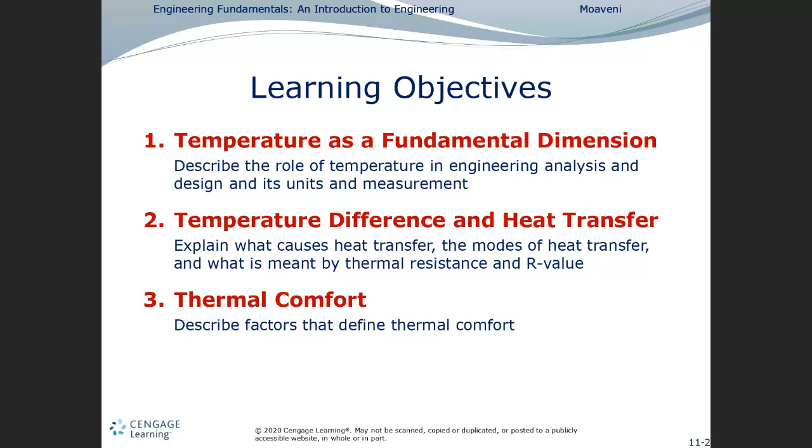Okay, yeah. All right, now you're getting into more how many molecules are vibrating, right? So that's going to basically determine how hot or cold it is. The faster they are, the hotter something is; the slower they are, the more at rest your molecules are, the colder it is. All right, that's good. So let's talk about temperature. If I can find it, what did I do with it? I think it disappeared. Oh well.

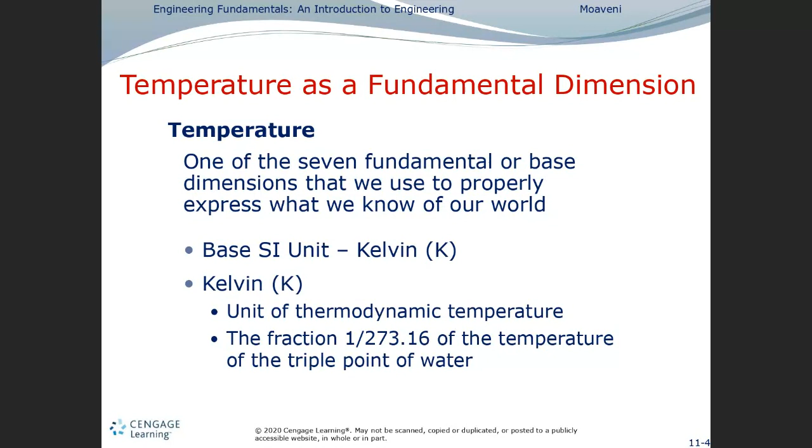So again, let's talk about temperature. Temperature is one of the seven fundamental or base dimensions that we use to properly express what we know of our world. Base SI unit: Kelvin, obviously, we've talked about this before. Celsius, right? And then imperial Fahrenheit, of course. But understanding what temperature means and what its magnitude or value represents is very important in understanding our surroundings, right?

The final project is a group thing too? Yes, right. The final project is a group thing.

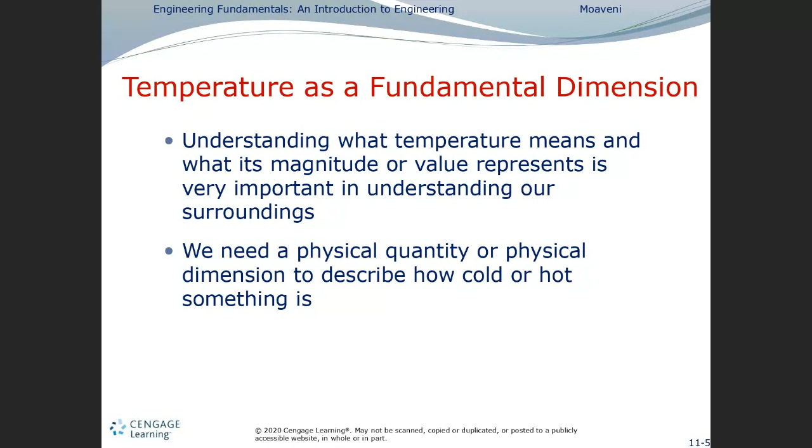We need a physical quantity or physical dimension to describe how hot or cold something is. So when you look at the role of temperature in engineering design, developing a good understanding of what is meant by temperature and how it is quantified is necessary in all engineering disciplines. So let's talk about temperature. I can't see my slides anymore. Oh, there it is. Here we go.

So temperature is a measurement, right? Temperature is the measurement of the object, more or less. And so it represents the level of molecular activity, as Hunter pointed out, provides a measure of molecular activity, as Cassandra pointed out. The molecules of a substance at a high temperature are more active than at lower, right? So what's the difference between temperature and heat transfer?

Nobody knows? Is temperature like the temperature of an object, and heat transfer is how much it's radiating off or onto something? Yeah, that's close, pretty close. Yeah, I like that.

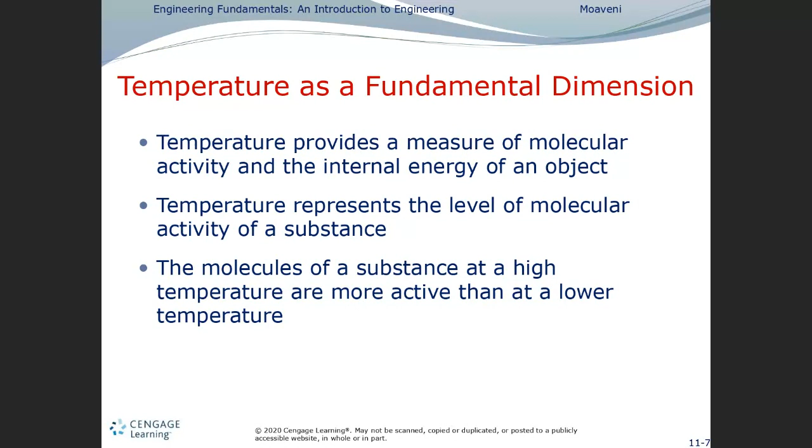So ways to measure temperature. What are some things you would use to measure temperature? Thermometer. What's another one? The laser thing. Right, like a laser, absolutely. And then there's the thermal camera. So the laser would be something similar to that. Another one would be a thermocouple. And then you have a thermistor. Then you have different types of thermocouples.

I'm jumping ahead in my slides. Let's see. Where we at?

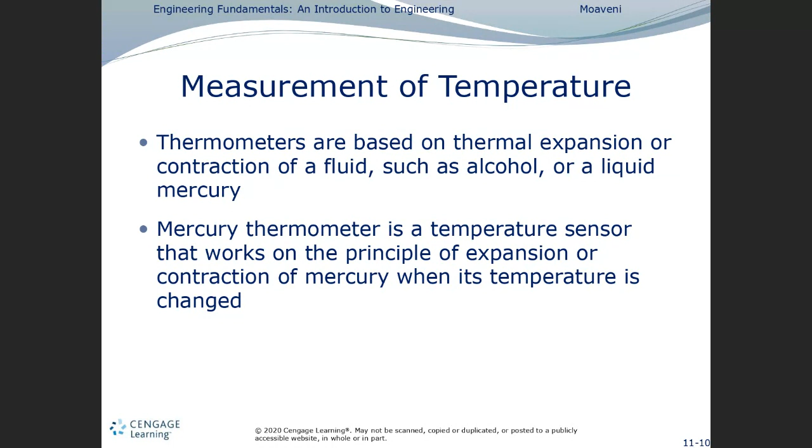Do you all have any dealings with thermocouples? No. Okay. So you use thermocouples, and you have different thermocouples for different ranges of temperatures. And obviously you all know about thermometers. Back in the day, you used to use mercury thermometers. You don't use those anymore because mercury is poisonous.

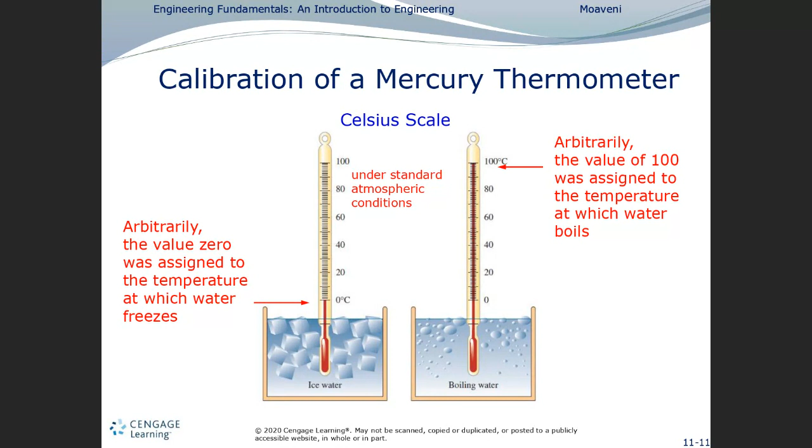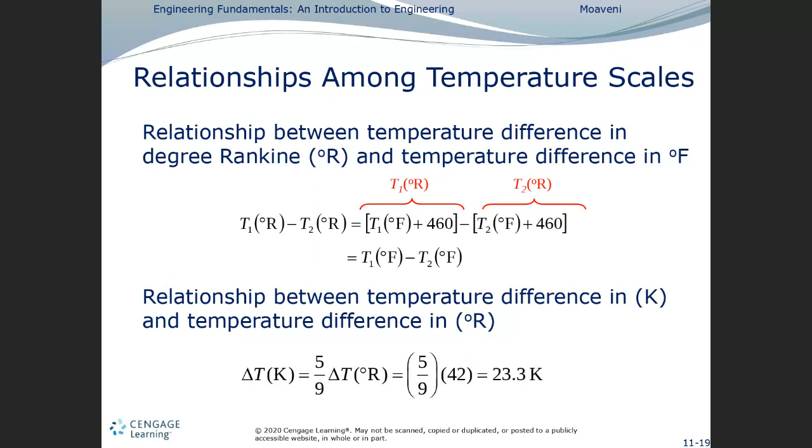This is all stuff that we've already discussed, like relationships among temperature scales, so I won't go into that. But let's jump into heat transfer. Temperature difference and heat transfer. Heat transfer is a form of energy transfer that occurs between bodies of different temperatures.

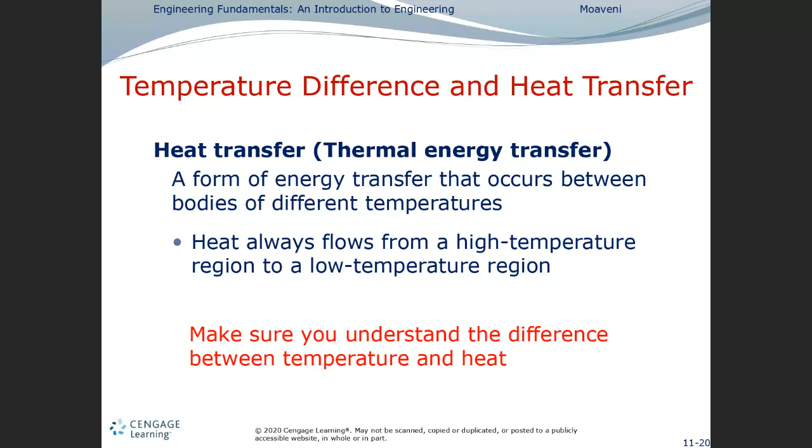Keep this in mind: heat always flows from a high temperature region to a low temperature region. Keep that in mind. And because it's energy, you have your units for energy, which is BTU, and calorie with a lowercase c.

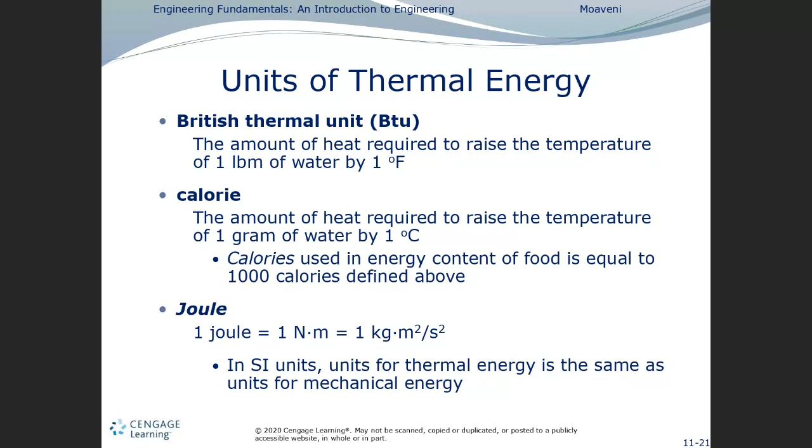Notice there's also uppercase C Calorie, which is also for energy, but it's usually used for food, so you'll see an uppercase C on food labels. The lowercase c calorie is energy that's used for heat transfer. And notice one uppercase C Calorie is equal to 1,000 lowercase c calories. So keep that in mind as well. These are just the conversions.

All right, so let's get down to the nitty gritty. Conduction, convection, and radiation. These are the three types of heat transfer. What is heat conduction? Anybody know?

What is heat transfer? Not heat transfer, I'm sorry. What is heat conduction? Yes, it's a way heat is transferred, but what is that particular way when you're looking at conduction? Two solids touching, absolutely. So somebody's been reading.

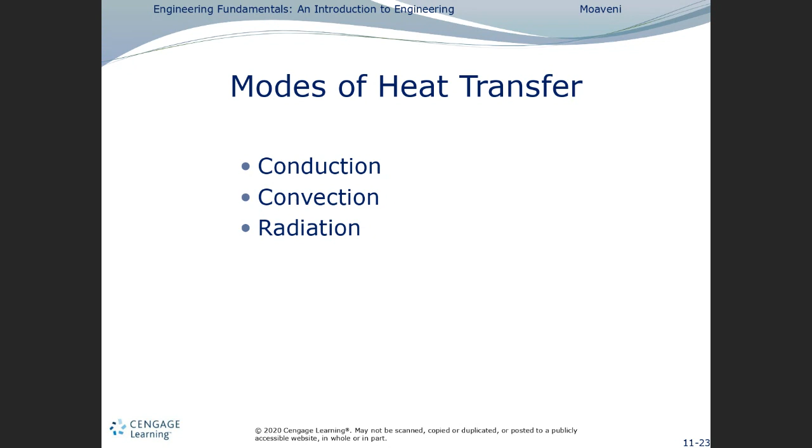Somebody has been reading. So conduction is a mode of heat transfer that occurs when a temperature difference or gradient exists in the medium. I know that all just sounds funny. A medium is an object. It could be an object, it could be a fluid as well, right? That's why they say medium. The energy is transported within the medium from the region with more energetic molecules.

So that just says the energy is transferred from the object that is hotter to the object that is colder. It always flows from high to low. So if you put two objects together and one is hotter and one is colder, the energy is going to transfer from the hotter object to the colder object. The energy is transferred from a high temperature region to a low temperature region.

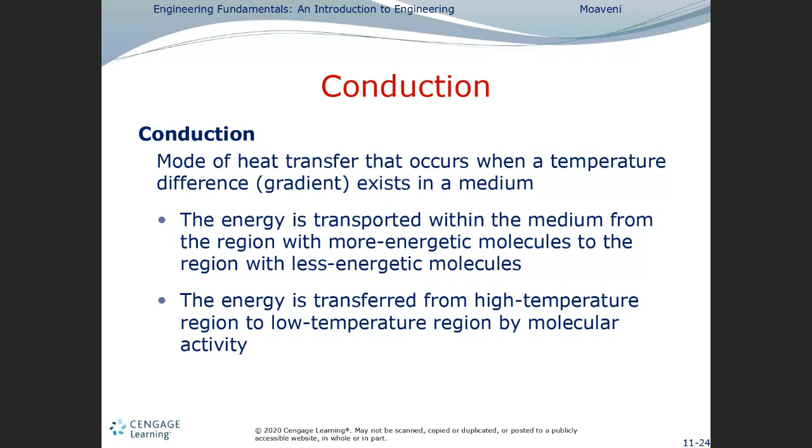And what do they mean exactly? It's more or less like osmosis. It's from two things touching. That's a mode of heat transfer by conduction. And then there's a formula for the rate of heat transfer. The rate of heat transfer by conduction is given by Fourier's law. Heat transfer Q is equal to kA, where A is the area, times T1 minus T2 over L, and that's the thickness of the material. And k is the thermal conductivity.

And so you have different thermal conductivities for different materials, right? My thermal conductivity, I have no idea what it is. But if I was trying to determine my rate of heat transfer, and I put myself up against something that was hot, and I was cold, and then I began to get warmer, or if I was hot and got in front of a fan and it began to blow on me, I would determine my rate of heat transfer by knowing my thermal conductivity. Now, seeing that we brought that up, let's do a problem.

Finding a good old example. Isn't it like if you were to touch something hot, it makes you hotter and then you cool it down, right? Well, it depends. It will get cooler, but if it's a constant heat rate mode of heat transfer, such as a fan, the fan isn't going to get hotter. But what would happen is the room would get hotter. But if it's a large room, you're not going to see a temperature change, right?

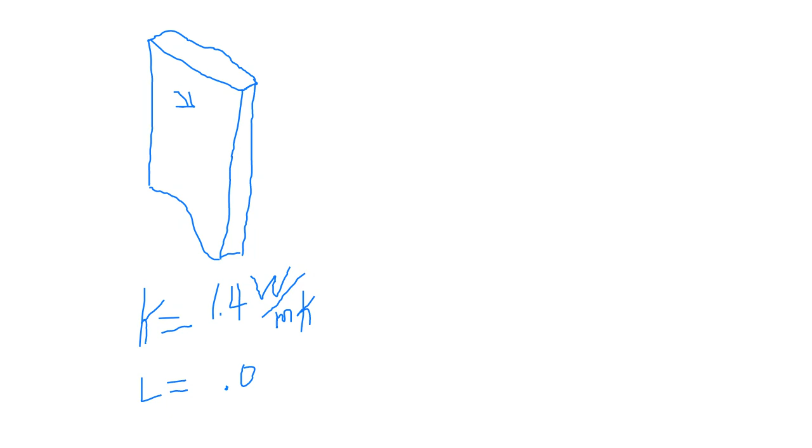What are the units? 1.4, we got a W. What is that W? Nobody knows? Oh, okay. So watt. Now L is 8 millimeters, which is equal to 0.008 meters.

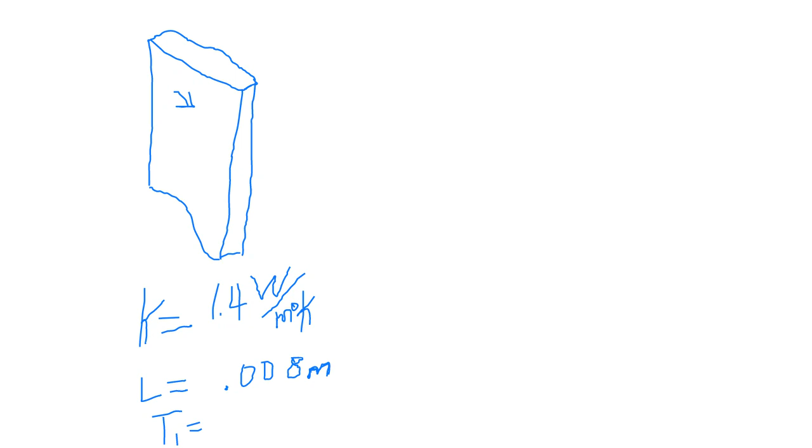So then we got T1 and T2. This right here, MK. Yes, that is MK. M dot. Ooh, that didn't look right. M dot K. That M dot is just M times K. All right. So then we got T1. What is T1? It's 20 degrees Celsius. And then T2 is 5 degrees Celsius.

All right. So what's the area? What is the area? Area of the pane, the window pane. What is the surface area of this window pane? 1.8 meters squared. That is correct. 1.8 meters squared. All right. And so that's everything, right?

So then Q is equal to KA delta T, so T1 minus T2, over M. K. So M, what is M? It's just meters. K is Kelvin. So then that means you would have to convert your temperature to Kelvin. All right. So when you convert this to Kelvin, then what do you get?

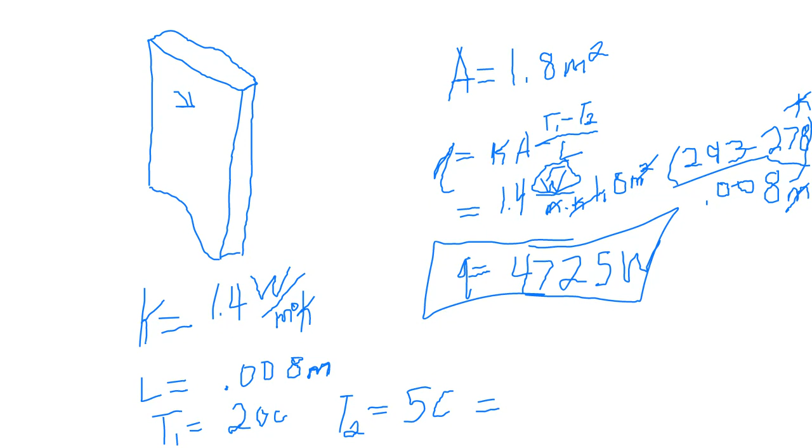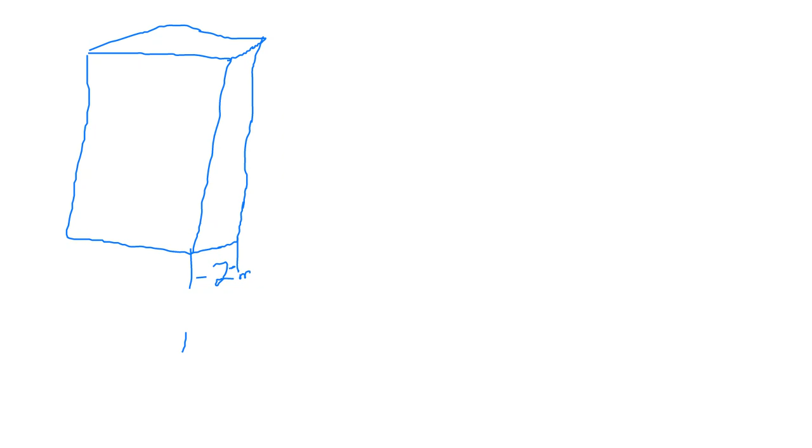All right. So say you have the same little window pane. It's a little thicker though. Only thing we're changing is this. Let's make that 2. Two meters is the thickness. And then the material, we're going to choose something different. Oh, interesting. I got a quantity in here for human muscle. So let's say this is human muscle. It's kind of curvy, so it could be a muscle, right? Maybe a little bit. And let's say K is now equal to 0.41.

0.41, wait, that's ugly. Let's get that looking a little better. No, then I'll be like, let's get it looking better, and then it doesn't look better after I do it. That's horrible, right? That's just horrible. I'm focusing. I'm focusing. Wait. Almost.

So that's a watt, and that's a meter Kelvin. All right. Right off the bat, what does that say? The thermal conductivity of a muscle is a lot lower than the thermal conductivity of glass. So what do you think is going to happen? Just thinking about it before we actually try to solve this problem. Anybody? Nobody? Okay.

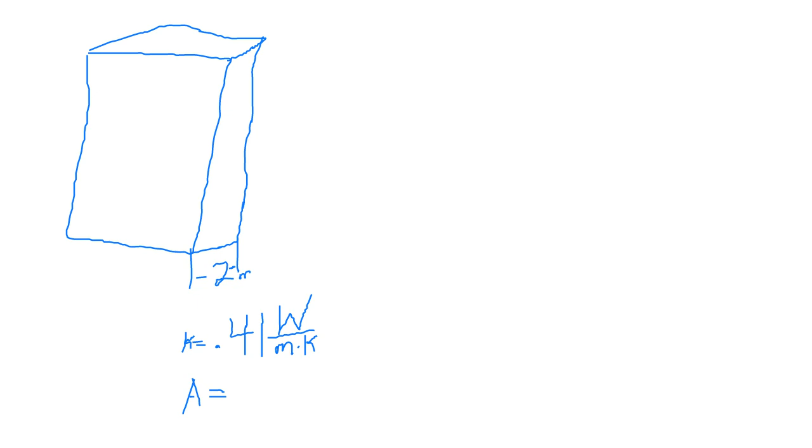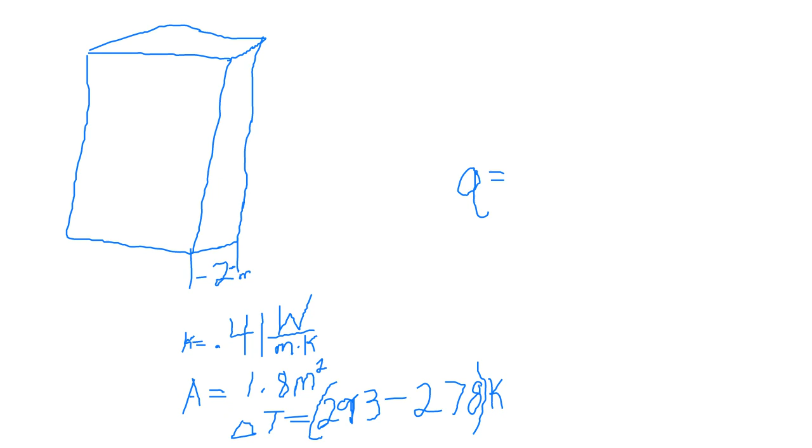All right. So, anyways, let's complete the problem. So A is the same. A is 1.8 meters squared, right? Delta T is the same. It'll be 293 minus 278 Kelvin. And so what is our Q? We changed that up, right? If we were to leave it at 0.008, just to leave everything the same but our K, what do we get our answer to be?

Remembering that Q is equal to KA, T1 minus T2, over L. And so Q is equal to, what's the answer? Is your calculator not working at this point? All you're changing is 0.41, right? And you just plug in. What's the answer? Low participation.

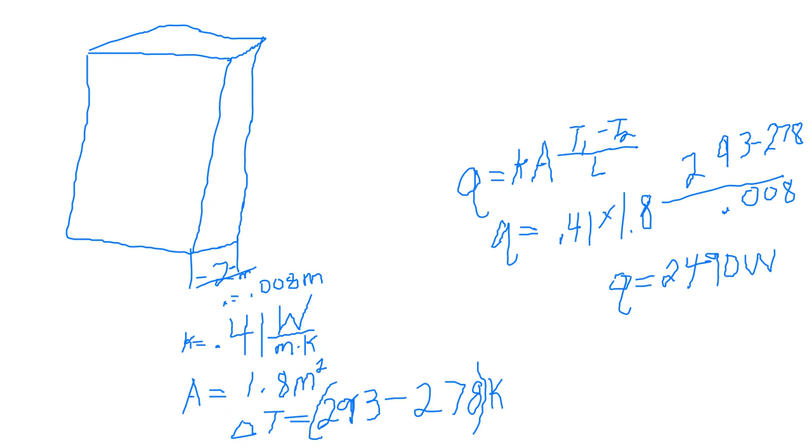So the next thing we'll cover is thermal resistance. Just the opposite of thermal conductivity. You want something that resists heat transfer. And so this is where we will look into thermal resistance. It's insulating materials, right? It's a material that insulates.

So obviously glass isn't going to be something you're going to use for insulating anything, right? You're not going to use glass. You're going to use something else, something that has a high thermal resistance, something that has a low thermal conductivity, right? That makes sense.

All right, and so to calculate thermal resistance, you recall Fourier's law. And so thermal resistance is just the thickness over the conductivity times the area. All right, the L divided by K times A. It's your R factor. And then on other aspects of thermal resistance, you're going to have L over K, or your R factor.

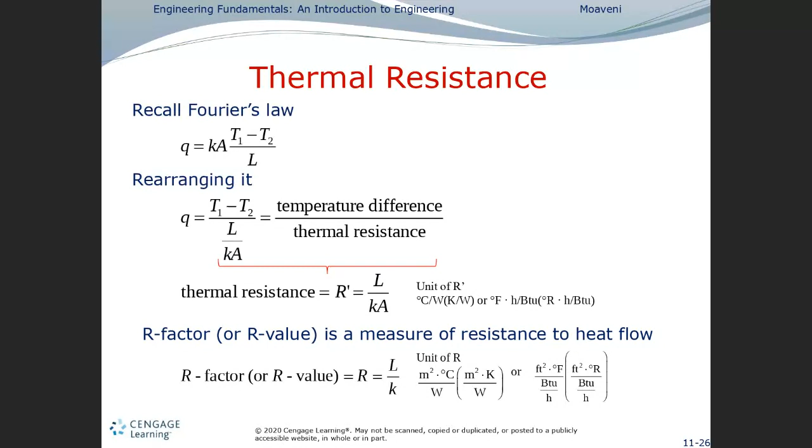I know, because you guys are being real quiet, not really participating. You know, I got 3 people. Nobody's talking. It's like, man, y'all been mad at me since your presentation, I guess. It's like, you made us talk. It's like, oh, my bad. I won't do it again.

All right, so example 11.6. If you go with the glass, basically your thermal resistance, so your R prime, right? It was equal to L over K times A. We're using the same area, the same thermal conductivity for glass. So you'd be 0.008 meters divided by 1.4 times 1.8.

And that equals, what does that equal? Right, 0.00317 K/W. All right, and that's R prime. And then, if we were to do the R value or R factor in glass pane, because it's 2. So you got R prime, you got R. So R is L over K. All right.

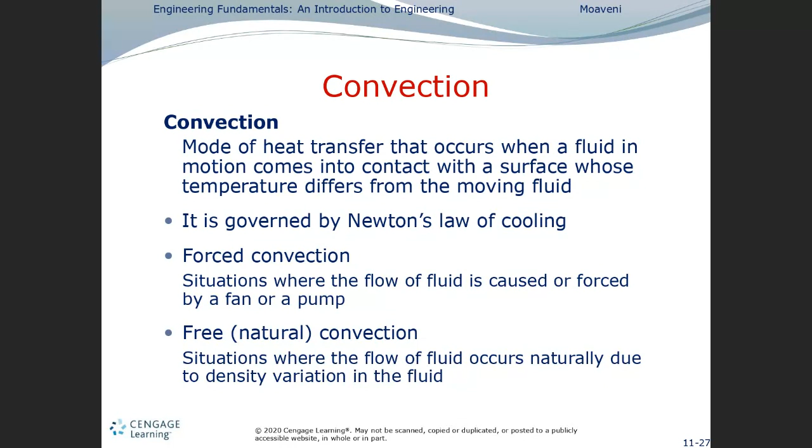so then we have Newton's law of cooling. For both forced and free convection, the overall heat transfer rate between the fluid and the surface is governed by Newton's law of cooling: Q equals h times A times (T surface minus T fluid). h is the heat transfer coefficient, A is the area, and then you have the temperature change.

Also, I want to go back. Well, we'll cover it here. So let's look at an example for Newton's law of cooling and cover what I have in mind. If we look at example 11.9, oh, wrong direction.

So example 11.9 states, determine the heat transfer rate by convection from an electronic chip whose surface temperature is 35 degrees Celsius and has an exposed surface area of 9 centimeters squared. The temperature of the surrounding air is 20 degrees Celsius. The heat transfer coefficient for this situation is 40 watts per meter squared Kelvin.

All right. So then you got this electronic chip. Right. And the area is 9 centimeters squared. All right, that looks horrible. H is equal to 40. And that's watts per meter squared Kelvin.

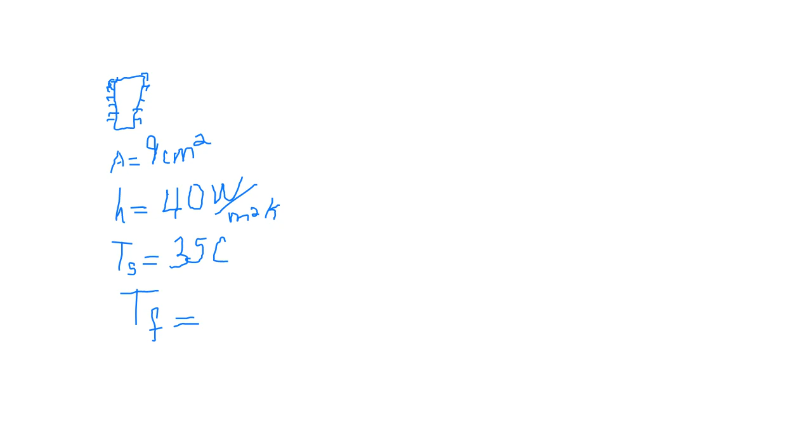And then we got T surface, 35 degrees Celsius. And you got T fluid is 20. All right. And so what is the rate of heat transfer here? Q equals HA times T surface minus T fluid. And what is Q?

Nobody knows. Nobody knows what Q is. Disclaimer. This is in your book, right? Example 11.9. Y'all can just say, oh, type it in, 0.54 watts, right? Yeah. Y'all are asleep tonight. Y'all don't want to work with me tonight. Y'all are ready to go. Okay. Well, we just got a couple more examples and I'm gonna let y'all go.

All right, so Q is... Oh, it's in your book, Cassandra. All right, so it's 0.54 watts. All you have to do is plug in everything here, right? So you got H, which is 40. You got 9 centimeters squared, right? And so you just divide that 9 by 100 squared. So that'll be 1,000... you move it over 3 times. So it'll be 0, 0, 0, 9, or something like that. So 100 squared, I think it's 10,000. Yeah, it's 10,000. So you move this over 4 times. So you have 3 zeros in front of the 9.